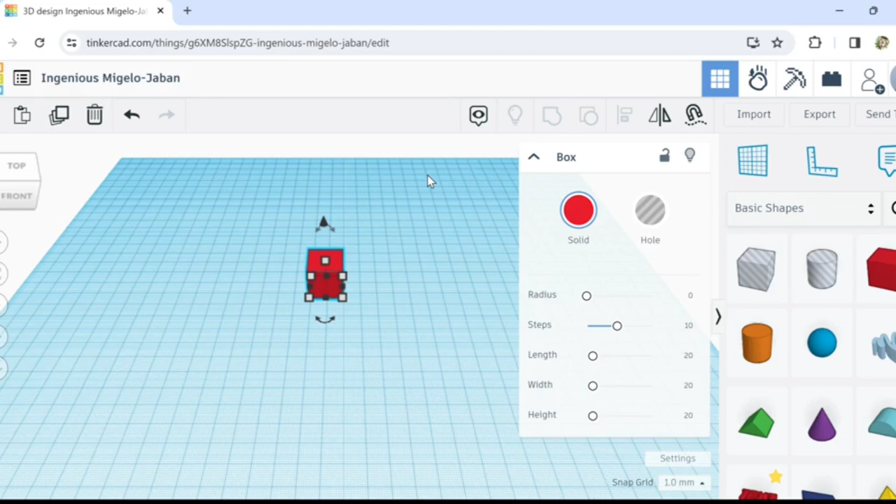Okay, so you guys probably saw the thumbnail - me and Troy are having another challenge. He got to choose the topic this time, and he chose a door, like a working door for a house. We have to try to get the hinges working, and maybe even make some internal parts. I don't know, we're not going to have a metal spring like a real door would have. I'm trying to think of how a normal door opens and closes with the knob. But anyway, let's start on our door, and we for sure have to get the hinges working, and we might even try to make the doorknob function somehow, maybe not like a regular door, but how we want it.

So let's just start, we'll kind of make it up as we go. Let's actually just make it real. We're gonna start off simple because I want to see if some of the stuff even works. So let's have a base for the frame. We want a platform like this, and then a door frame that comes up and around for our door to go in.

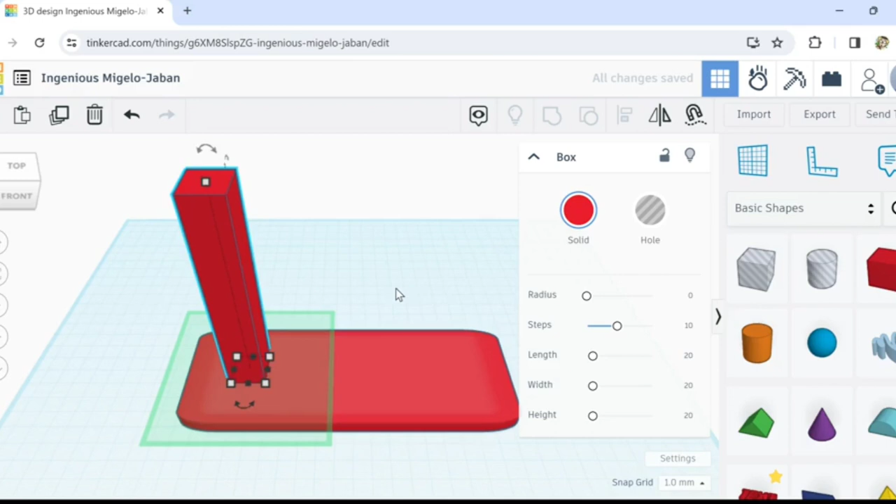We're not going to be too fussy. This is too wide though. Is 10 going to be too small of a frame? I don't know. Okay, 10 - that seems pretty small. Let's go 15 by 15.

Okay, hey, did you guys have a good Christmas? Anybody get a 3D printer? Oh, that'd be cool. Or even some filament would be a good gift. Ah, yeah.

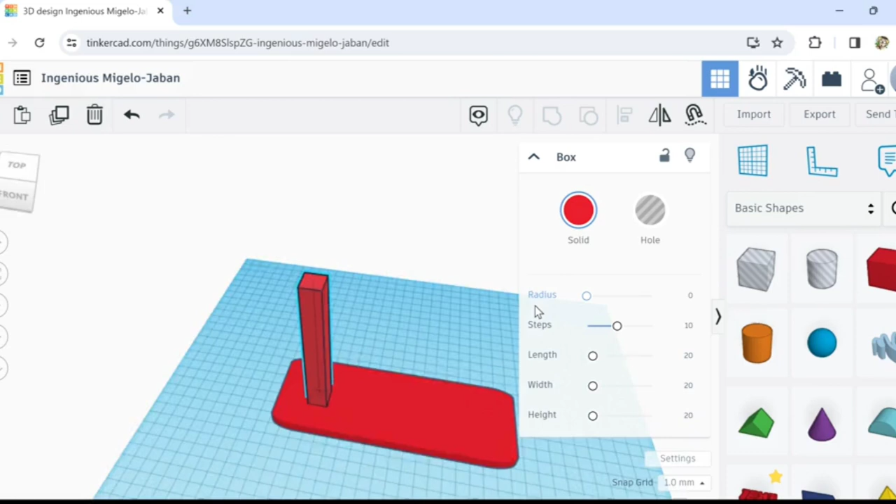Okay, like I said, we're not going to spend too much time on these trying to make everything perfect. Let's just get it moving so we can have most of our time for trying to get the hinge and maybe some kind of mechanism for the doorknob.

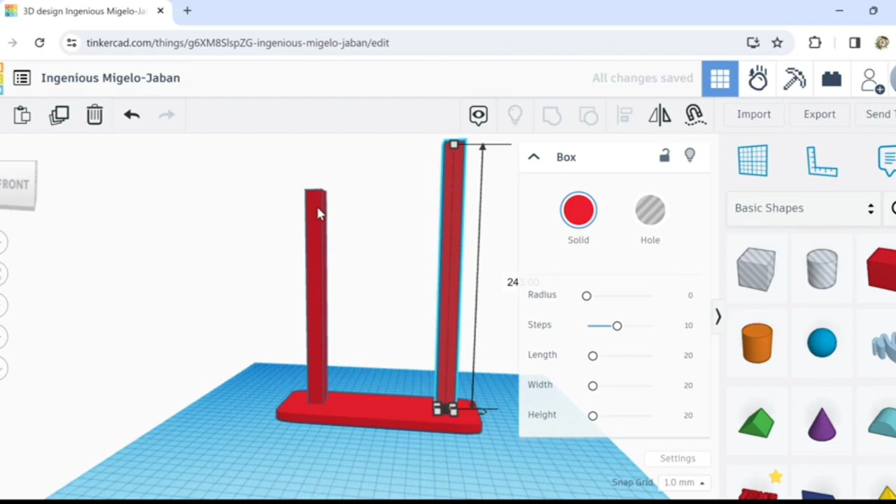Okay, let's just slide this over. How wide's the door? Let's go back a bit here. Okay, how tall is this? 243, okay we'll stick with that for now. Okay, let's duplicate this and flip it over. Oops, that was not what I wanted to do.

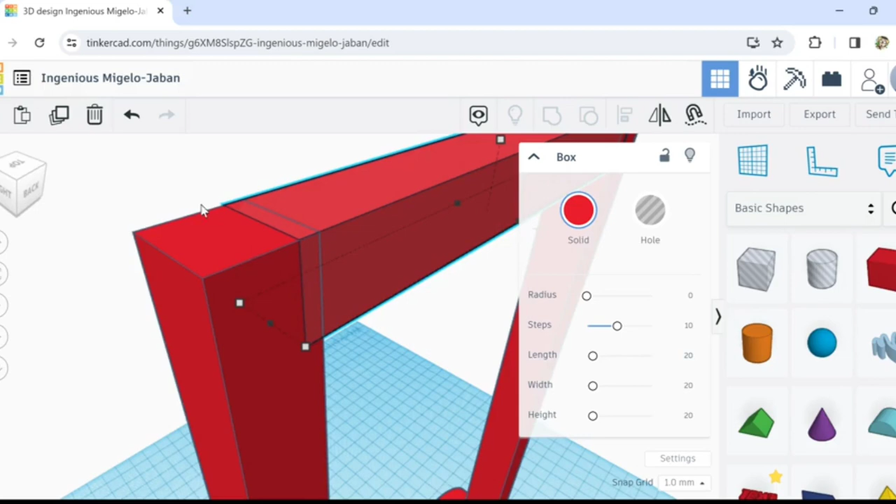Okay, let's just make a little top beam quick, nothing special. There, our door's done - it's just an open walkway. Are we gonna win? I'm not sure what Troy's doing, so we'll have to see. I don't know if I'll be able to get my door all crazy decorated, but I want to see if I can get it working.

Oh, I thought of something else too - do we want it to swing open both ways? Most doors just swing one way. We're going to have a stopper strip so the door only goes one way, so it only opens like this and then closes. So maybe the hinges will be right here.

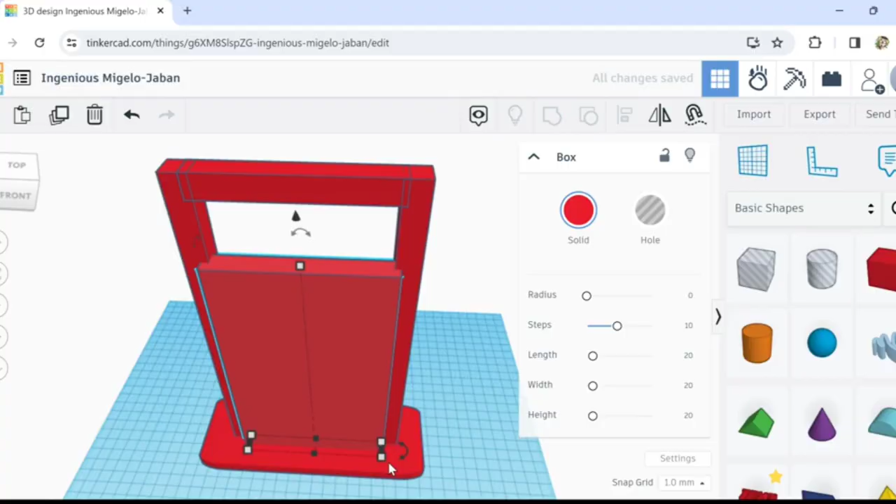Okay well, we could do this really ghetto - let's just duplicate this, and make this into our door. So let's just go like this. Whoops. Let's see what it looks like here.

Let's get a different color for the door. What color are doors? Great. Wait, I wish this door frame wasn't red, it looks too weird. Let's do a brown door frame, like a wooden one. There, we got to be able to visualize it, huh?

Okay, so we do have our little setup here. That'll be fine. Okay, I guess the first thing... oh gosh, I don't know if we're going to be able to get a doorknob mechanism inside of that door. Probably not.

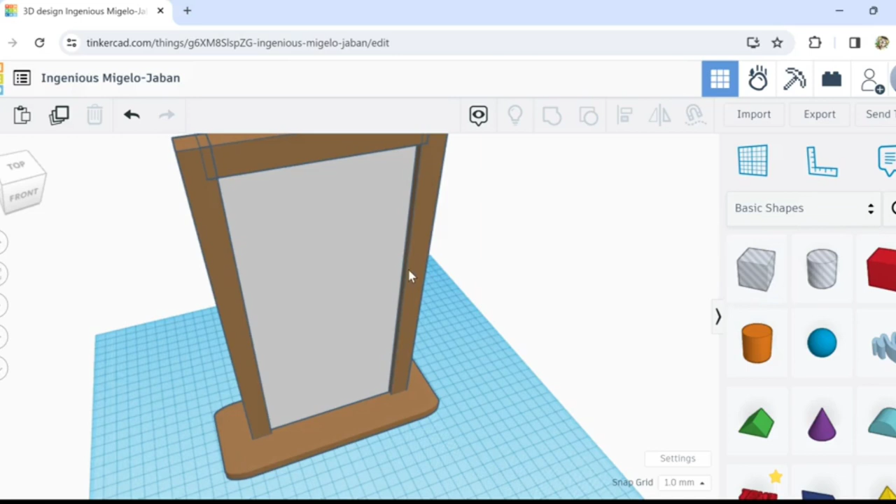Here, let's - I'll tell you what I was thinking. Oops, what am I doing? This and this. Oh, man.

I was thinking of having the knob attached to a gear inside the door. So when you turn the knob, it turns the gear, and that gear turns a little rod that comes out into the door or into the frame. But we'd have to internally fit that all inside there.

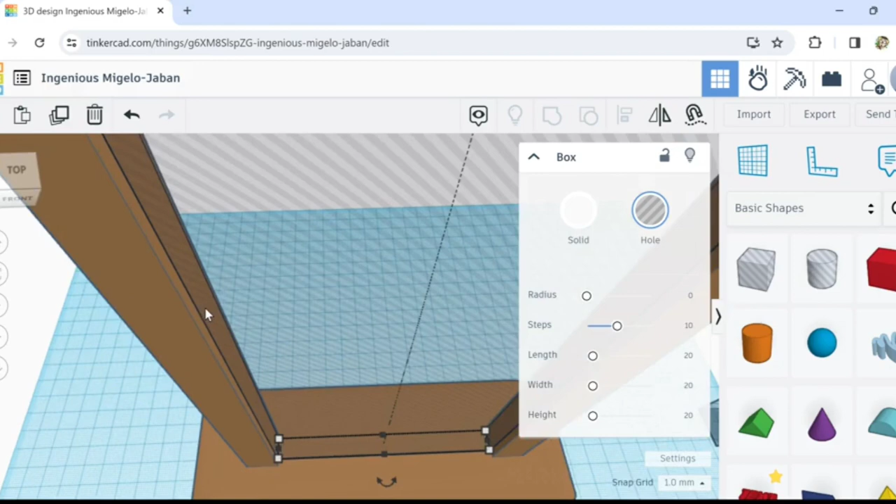Oh my gosh. Yeah, we might not be able to do that. But we do want to make it close shut and lock a little bit. So I have an idea how we could do it a lot easier. I guess we'll just do one step at a time.

Okay. Now for the hinges. A real door... okay, let's see how we could do this. Well, let's grab a real door, you know, the hinges.

There's like a pin that goes down to connect the two parts. So I wonder if we should do that, have like a pin type of hinge system. That'd be kind of cool. I've never done that. Okay, let me get it ready because I have a feeling I'm going to fumble around.

So I'm going to get a couple things ready and I'll bring you guys right back.

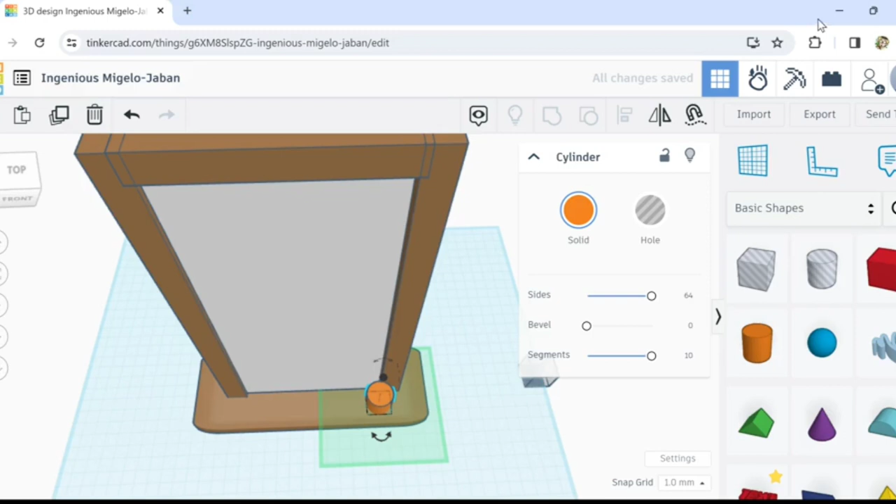Okay, so here's what I came up with. I have just these 3 little cylinders stacked on top of each other. And is there enough space between them? What the heck, how close are these? Oh dear, let me make these movements smaller.

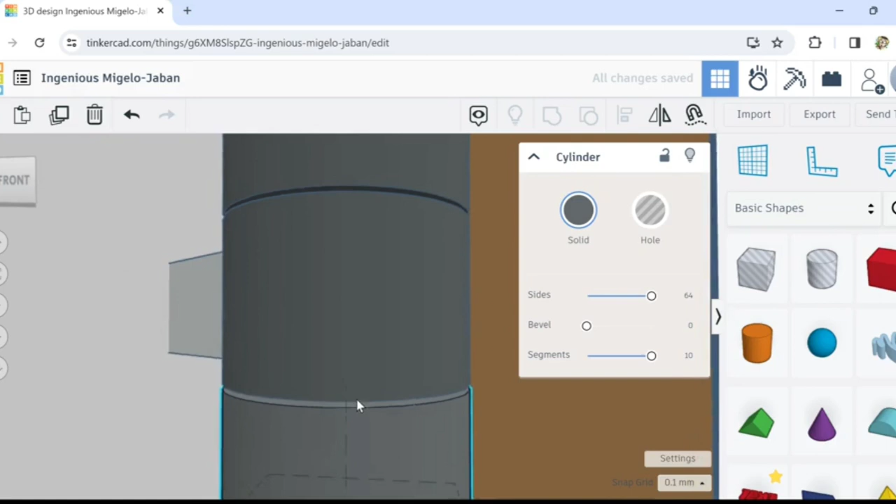I want a little bit of leeway, don't we? Okay, let's move these out before we connect them. Okay, that's good. Let's check the bottom one.

I would have done this already. I initially had some space, but I think I had to redo it or something. Hey, yeah, see, this one's got space. This one's got more space. Is that too much space? Okay, let's check it out.

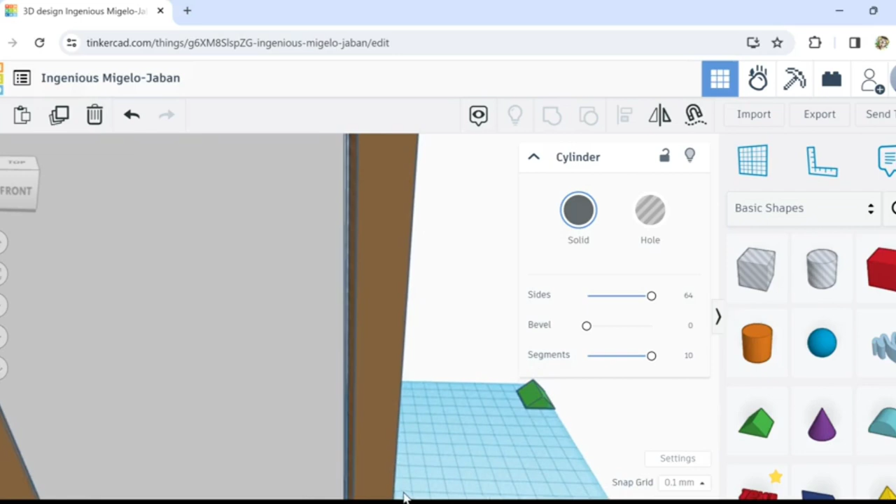Okay, I want it to be a pretty tight fit. So the only problem is I think if we 3D printed the pin, because see, I'm about to cut a hole through all these, if we 3D printed the pin, I think it would be too small and weak.

So what I'm going to do is use a little tiny nail that has the little flat top on it, and we're just going to drop it down into here and I'll cut it off. So it'll be like a little metal pin, like a real door. I think that will be awesome.

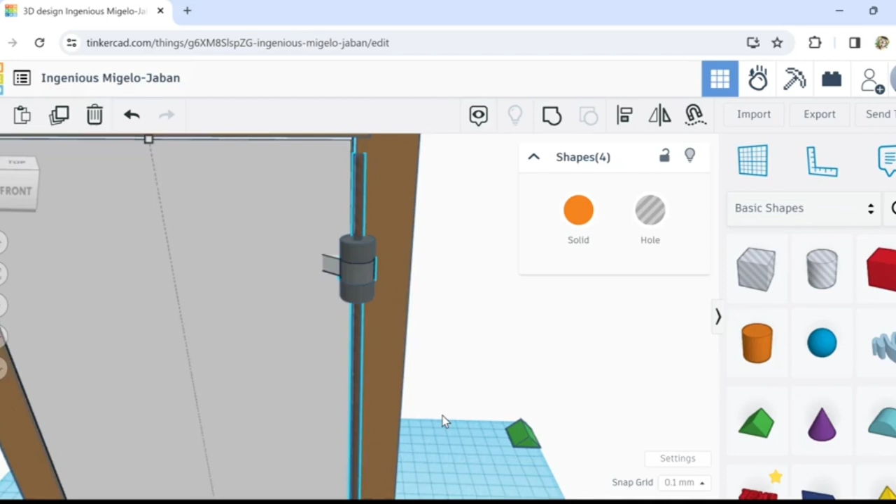So actually, let's duplicate this, because what we're going to do is group the door. See, the door is going to be attached to this middle one, and these two will be attached to the door frame. So it should make an easy little hinge-a-rooney.

So let's just select these. And did we select one of the... yes, we did. Okay, we selected this. Let's just group it.

Okay, and I also... here, let's move this a little. I also made sure there was a little cut right here, so this would not hit the door, you know? So this will fit right here, so the pin can go in. See? And we did that.

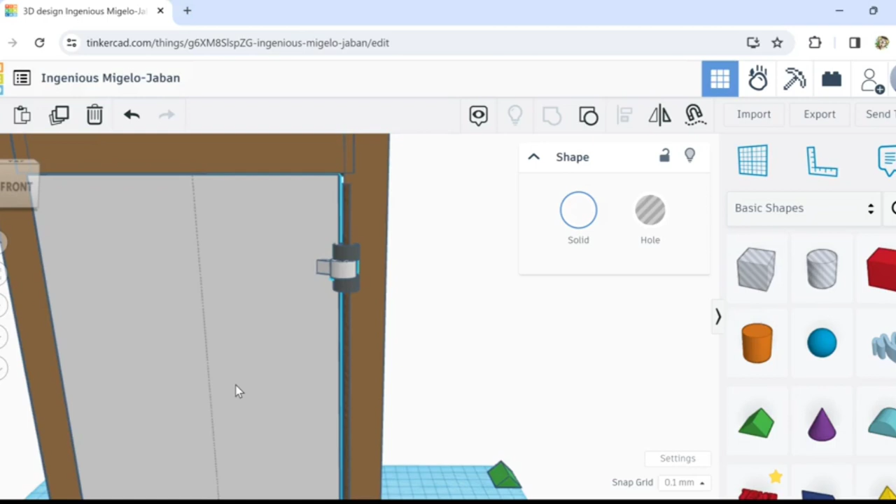It's only been, well, of recording, it's only been 12 minutes. So we can do more decorating on the door. I'll just print it separate, and then I'll put it in here and slide the pins in. So let's get this out of the way for a second.

Whoa! Yeah, I think that's kind of cool. The problem is, like I said, we'd have to print it huge or really big if we wanted to make a 3D printed pin, and I don't think that's necessary.

You know what? So let's just... I'd say we could just group this stuff together now. Okay. There. Okay, that's really cool, because now we can focus on the door itself, because the frame is pretty much done, except...

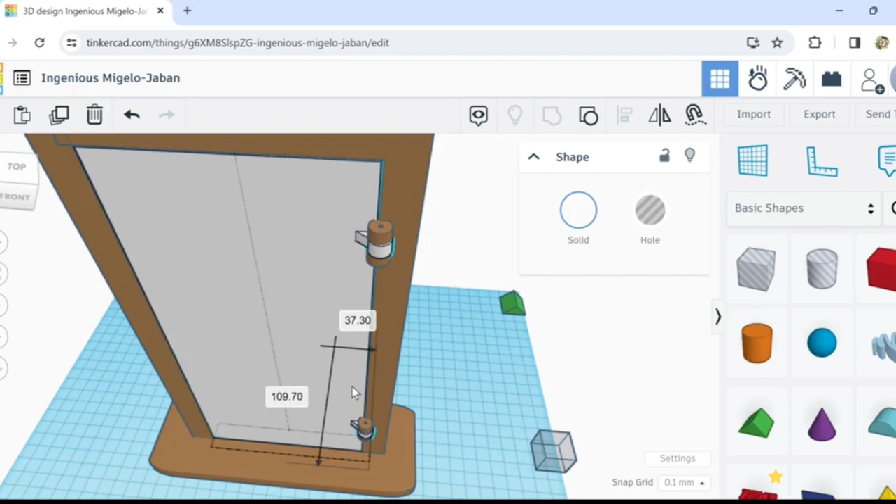Okay, let's check one more thing. Is that lined up? Okay, so what? It's going to go like that. Why am I fumbling? Okay, let's just say it's going to go like that.

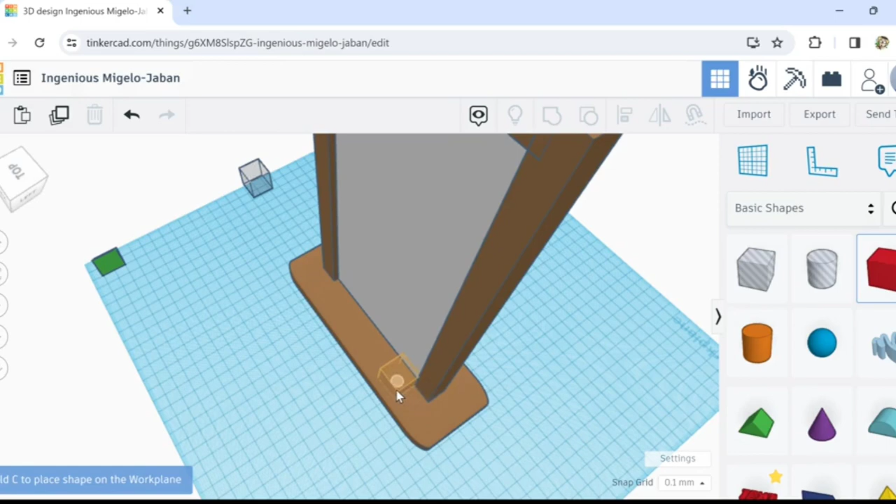Do we want... okay, and it's going to open towards us. So do we want like a little stopper? Let's check it out, you know what I'm saying? Yeah, maybe we should have like a little stopper thingy. Here, you'll see what I mean in a second here.

So you get what I'm saying? When we close the door, most doors would have like a little strip here to stop the door from getting too crazy. Okay, let's see, does it fit? Oh yeah, there we go. So yeah, I just kind of meant like this.

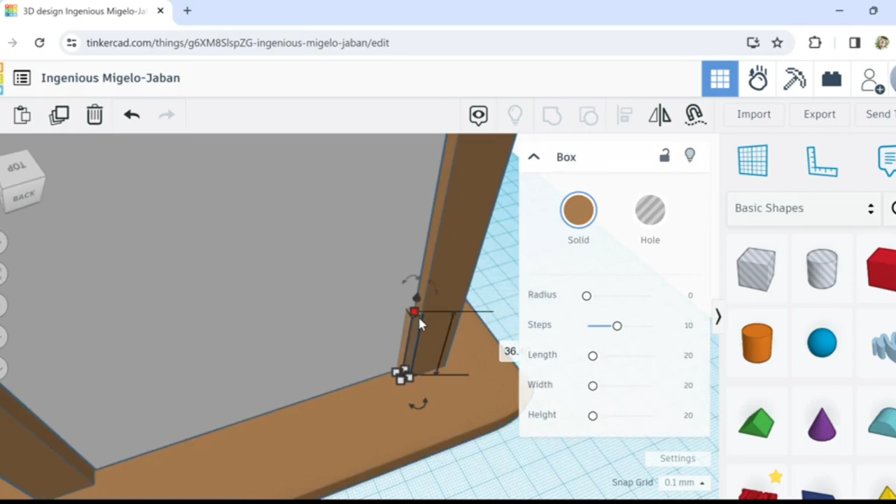We could turn it brown. Okay, and we just have to pull this baby up. Yeah, that'll be fine. Okay, let's pull it on up. Make sure it's going up in there. Oh yeah, we're good, we're good. Okay, there we go. Well, here, we might as well connect it to there, otherwise...

Wait, did we even group? I thought we already grouped all that stuff. Oh, we didn't group that side. Okay, whatever. Okay, there we go, look. Yeah, so there we go. See, the door will close and hit this. This will be the stopper, you know. Boop.

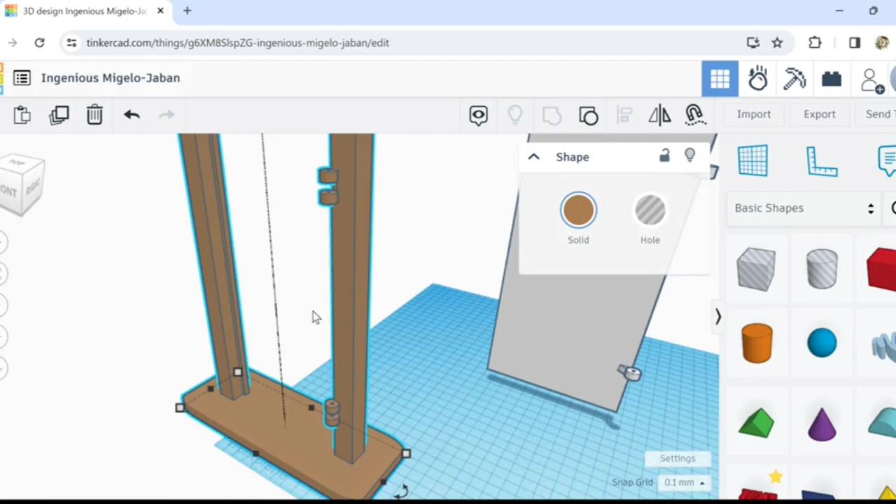Oh, crud. I guess we should figure out how it's going to latch close first. Okay, let's stare at it, or I'm going to stare at it and take a coffee break. Yeah.

Okay, what if we just do something simple, very simple, like this? So if we had a part, yeah, if we had part of the little sphere sticking out of the door, and then have a little dent that it fits into. You know, so like, let's say we make another one. So let's duplicate it, turn it to a hole, and then let's put it in here like that.

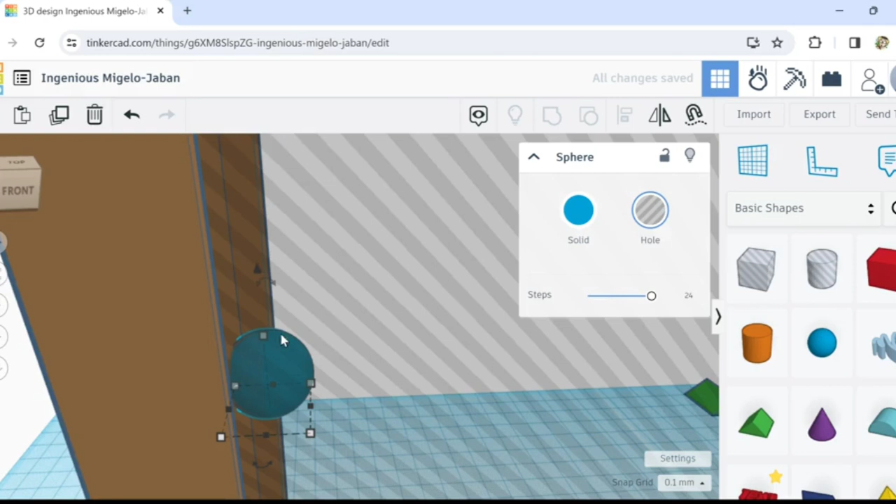Okay, and now combine that with the frame so it'll cut. Okay, there, so see, there's a little cut spot now.

Yeah, so now we got to select this ball. If you ever want to select something that's inside of something, just zoom all the way in until it highlights it, like there, see, now you can select it. There, we got it. And oh, we don't want this selected though. Okay. Uh-oh, darn it. Okay, start over.

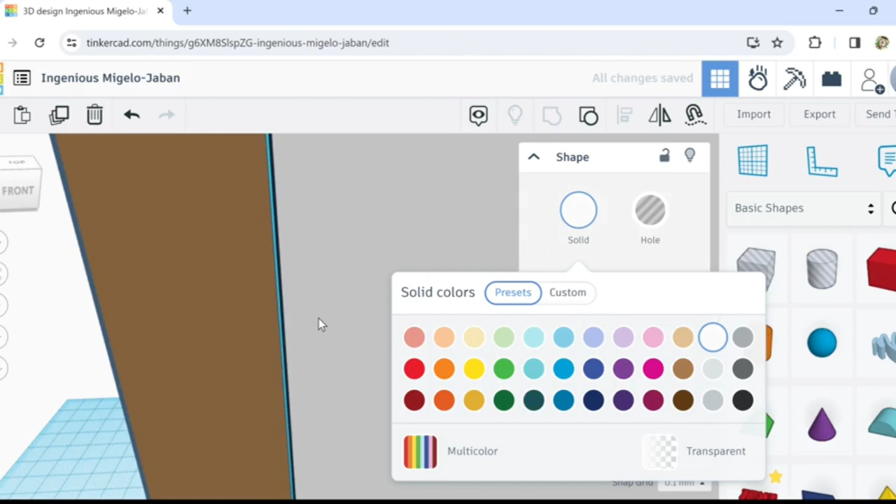Okay, select the door and the ball. Come on now, there we go. It shouldn't have been so hard. Okay, now hit group.

Okay, so now if we look, see? I think that's fine. So yeah, so this will just kind of close and snap into there, you know? So a very kind of simple, cheesy way to do it, but at least the door will stay closed, hopefully.

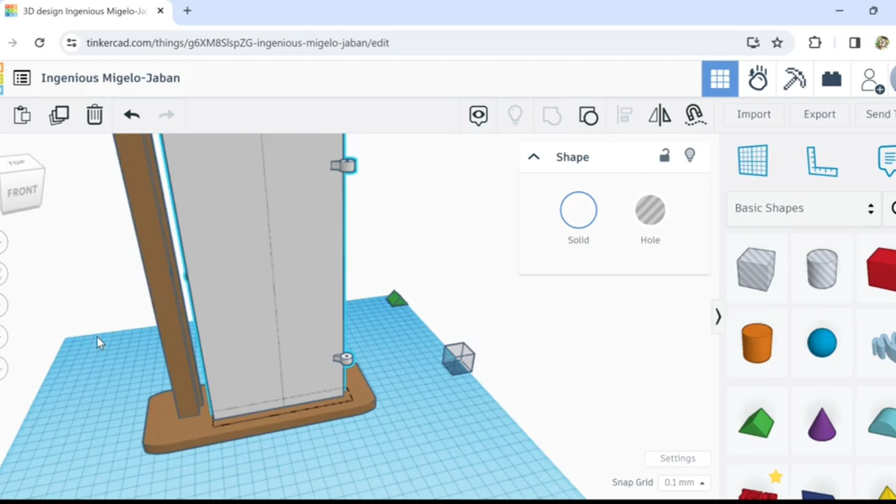Okay, let's get this looking like an actual door. This looks like a door to an insane asylum or something with no windows. We want some windows or something.

Okay, let's put this off to the side because we're pretty much done with that. Let's get rid of that. Okay, we are going to... so what we're probably going to do... oops, what am I doing?

Okay, so we're going to have to print this door. We're definitely going to want to print this door laying down. So let's do that. Okay, we'll hit D to drop it. Boop. Okay, there we go.

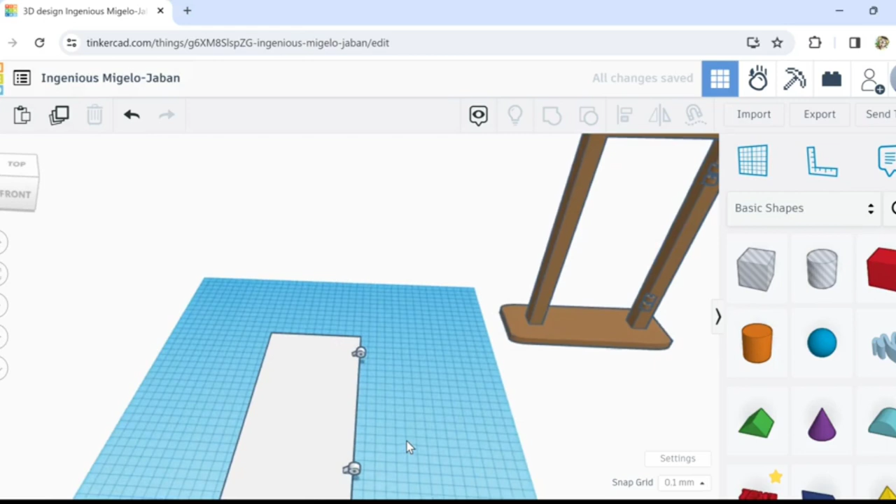Okay, let's think of what we want to add to it. So I think me and Troy think a lot alike when we are doing these challenges for some reason. And I almost guarantee, I bet he did something with the ring. You know how them cool doors have like that knocker ring on them? So like it'll be like a lion's head with the ring in his mouth, and then you go dunk, dunk, dunk. I have a feeling he did some kind of knocker ring on his. I could be wrong, but probably not. So we are going to not do that.

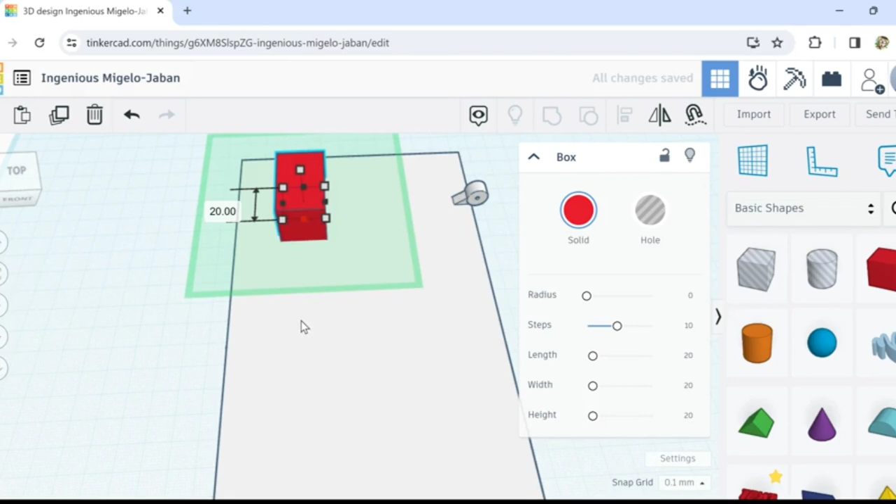So they're not the same. We're going to do ours more like a normal door. Let's do some windows and some kind of textures and decoration or wood trim, and we'll just see how it looks. I mean, that might be a little boring, but I kind of want mine to look like a normal house door, because I'm starting to do miniatures and stuff. I might even build like a little dollhouse or a room that I can 3D print objects and fill it, you know. So I think having a realistic door might be kind of cool.

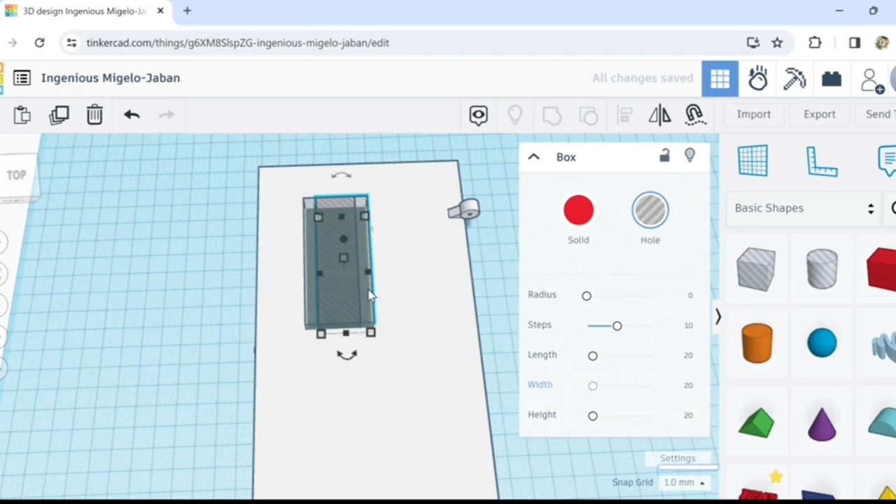Okay, so let me get, once again, because sometimes these videos get really long, I'm going to cut out some window shapes here. And, well, let's see, I was going to pause you guys, but let's just get it kind of rocking here. Oh, we need a little bit faster movements here. See, I'm thinking of just kind of something like this, and I might even, oops, let's see.

Let's see, should we delete this one, or I might even try to put some kind of little layer of clear plastic in it, so it looks like it has glass in it. I might try to do that. We'll see.

So, I'm thinking something like this. We'll duplicate it. Okay, for the top, for the window of it, like something like this maybe? Okay, I'll come up with a few little things and I'll bring you guys back in to see what we're going to do.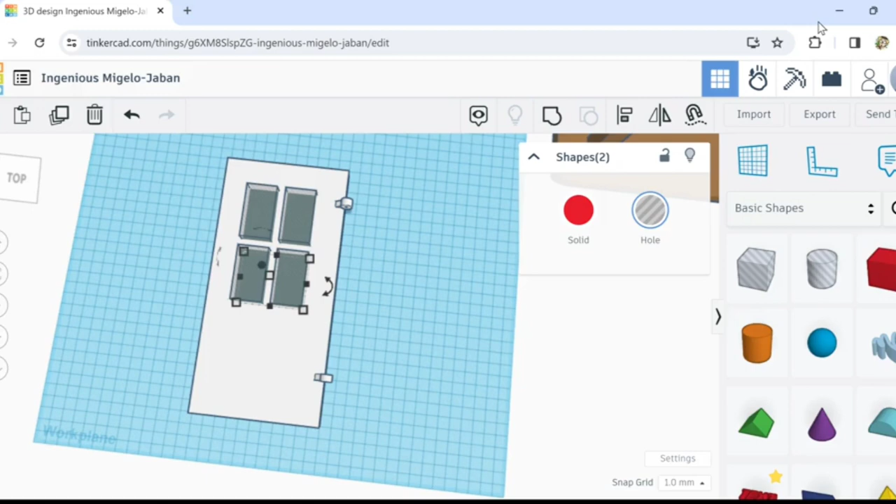Okay, so let's see what I got here. Actually, let's duplicate this so we have 2 sets of these cutouts. Yeah, so I made this piece as a little piece of trim that we will add to this afterwards. We can add it to both sides. We'll print it twice. So here, let's group these together.

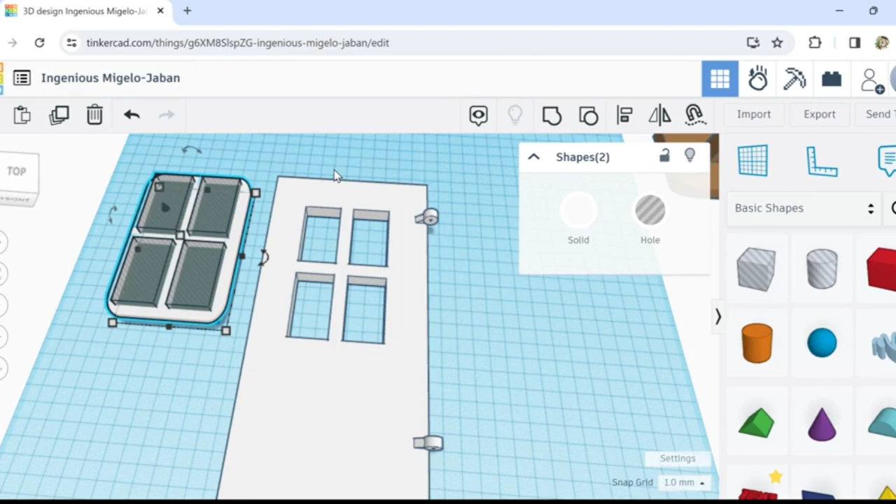Okay, so see, we got our holes cut. And then this will be the trim, you know, so this don't look so boring. Okay, group. There we go. And yeah, so see, this will go get glued onto here afterwards.

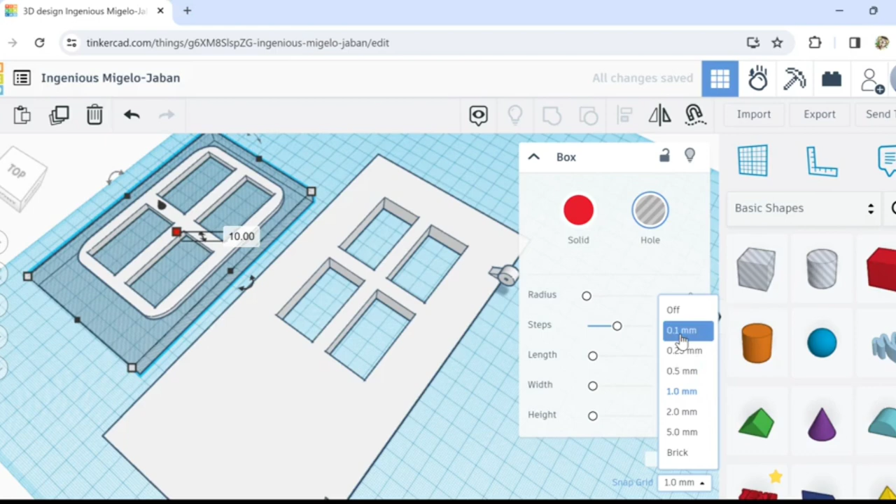And let's cut it flat. Let's see. Does this even have a flat bottom? Let's cut it a little flatter. Okay, let's change this back to 0.1. Let's cut a little bit off the bottom so it's not quite so thick, and then it's got a nice flat bottom too. Okay, let's raise this up.

I want this kind of flat so it doesn't look too crazy. Okay, let's just go with that. Okay, and group. Okay. Yeah, that's good. That's good.

Okay, now are we going to put a piece of... Should I put a real piece of glass in there? Wouldn't that be cool? Or I could find some real sturdy clear plastic, like when you buy something in the store and it's in that clear plastic that's really hard to open without scissors.

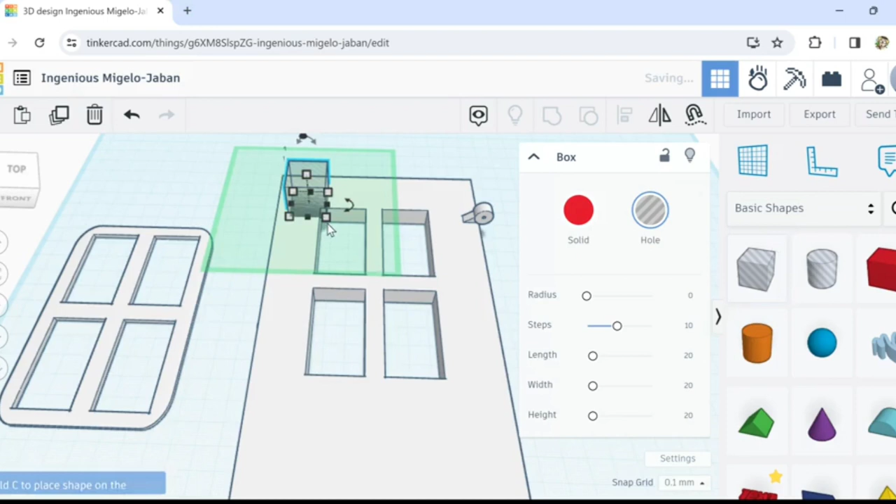I could probably just, maybe we should make a little indent for some of that plastic to fit in, like, you know. Here, let's see. So here, let's go like this. So yeah, you know what I'm saying? Maybe we should make a little depression. That would probably be fine, actually.

Okay, hold on a second. Okay, let's drop it down. What? Okay, so that's like 0.5 millimeters. Yeah, because see, I could cut a little piece of that sturdy plastic and fit it right in there. Oh, it's going to print weird, though. Oh, because this will be floating above.

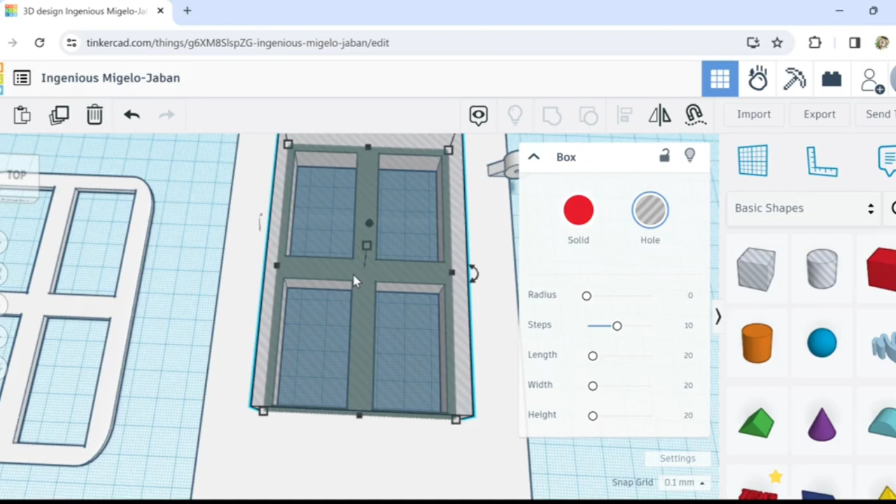Uh-oh. Maybe I don't like that idea. Because, see, I want to do everything on both sides. Oh wait, well never mind, never mind. Pretend I didn't say that. We can just add the plastic in on one side. Yeah, never mind, this will work.

So let's actually have it go down like that. Perfect. I think I'm just overthinking it. Okay, let's group it. There. See? Okay. So we'll cut a piece of thin plastic that'll fit in there.

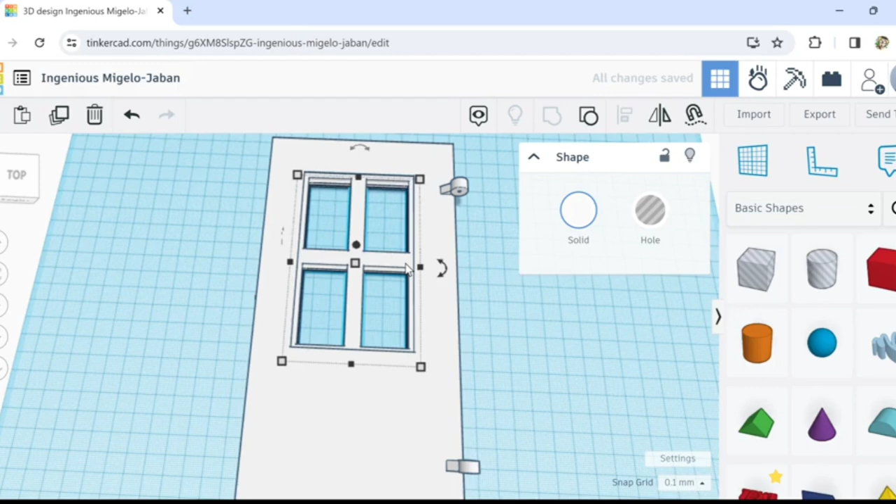And then glue this on. Oops. Yeah, and then these will get glued onto both sides, so we'll need 2 of them. We'll just leave it... Let's see. We'll just leave it connected for now so we can visualize.

Uh-oh. Wait, that should be different. Wait, why does it connect? Hold on a second. Oh... Oh, I see. Uh-oh. Okay, no, never mind. Jeez, I am really...

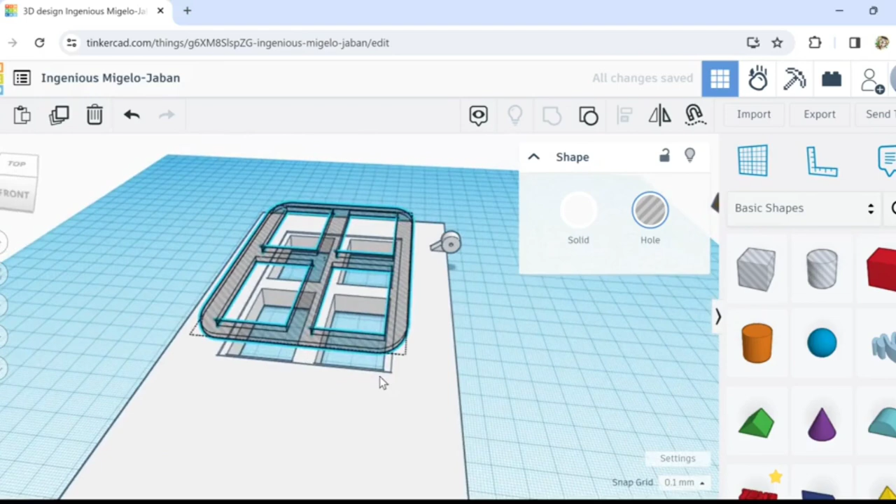It's just a door. It's just a door. It'll be fine, because it'll print just like this. Because see, these got cut down a tiny bit lower, but that'll work because it's going to print upward. So, wow, I'm just overthinking it. Okay, drop that down. We're going to need 2 of them, so let's just make another one.

Okay, that's good. Oh yeah, we got to make a doorknob. I mean, that should be pretty easy. Well, we got to make 2 of them. Yeah, let's just...

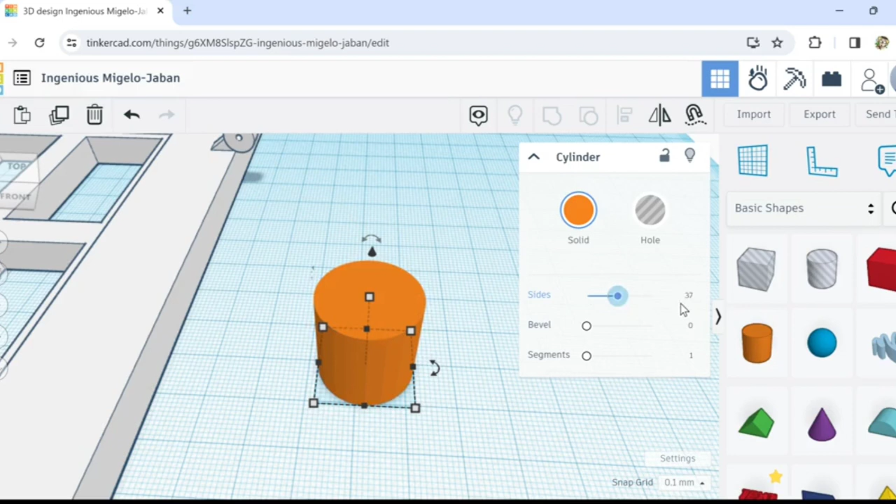Do we want a doorknob or kind of like a weird curvy handle? I kind of just want a doorknob. Do we make a doorknob? We already made a doorknob on something, didn't we? Okay, well, let's just make another one. Okay, why don't we start with something like that? I want to make it so it won't need supports, you know?

Okay, let's line these up. Okay, this is nice and weird looking.

Okay, put that over here. I'm just kind of winging it. So see, here's the little post that the doorknob would be on. We'll align it afterwards. And then what? Another one of these?

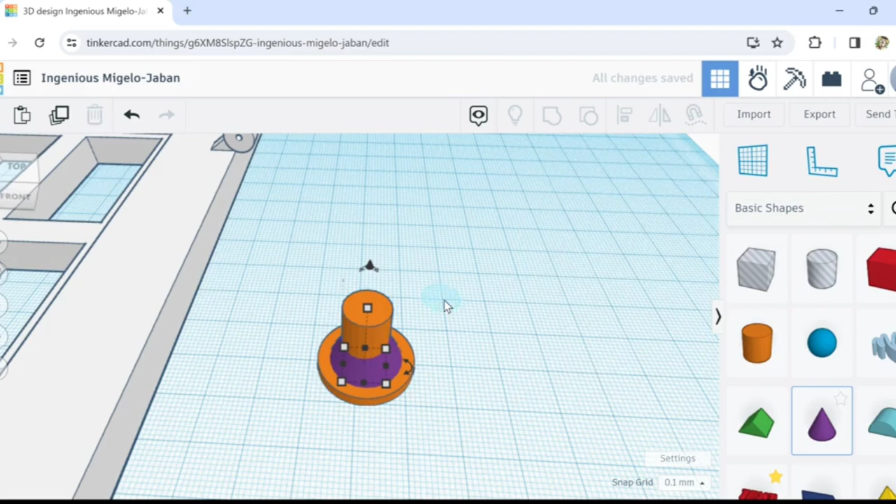And then, oh, maybe we could... Let's see, is there... yeah. Should we try... we could do the doorknob something like this, couldn't we? Yeah, I don't see why not. Oh yeah, oops, oops, come on now.

Yeah, look, we could even add to the sides. There's doorknobs that have like facets, you know? I kind of like that. Okay, we'll need to make it a tiny bit bigger, I think.

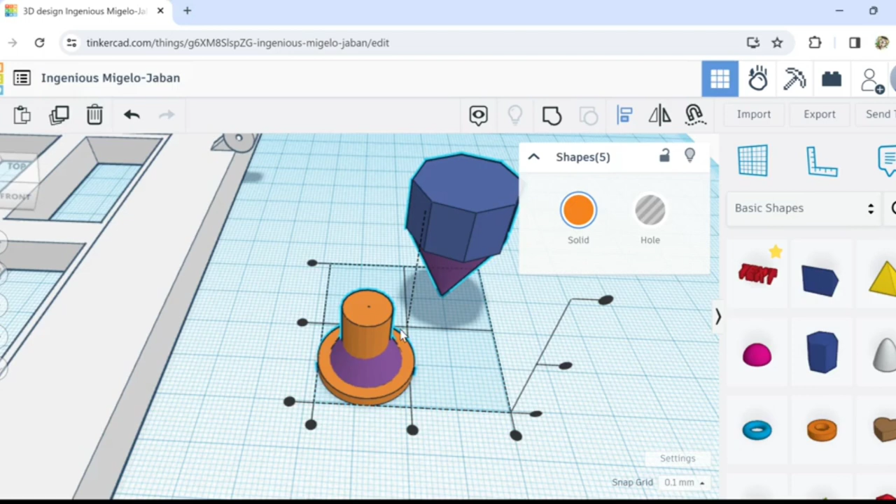This is, it's all different colors and goofy. Here, look, we can line everything up now. Ready? Boop. Boop. Dude.

This is great. Let's see. It's over. Do we have to make this bigger? You get what I'm saying? It's a little weird, but we don't want these hanging over. Honestly, that's going to be so small, you're not even going to notice that. None of that. Okay, let's make it into a color, because this is weird.

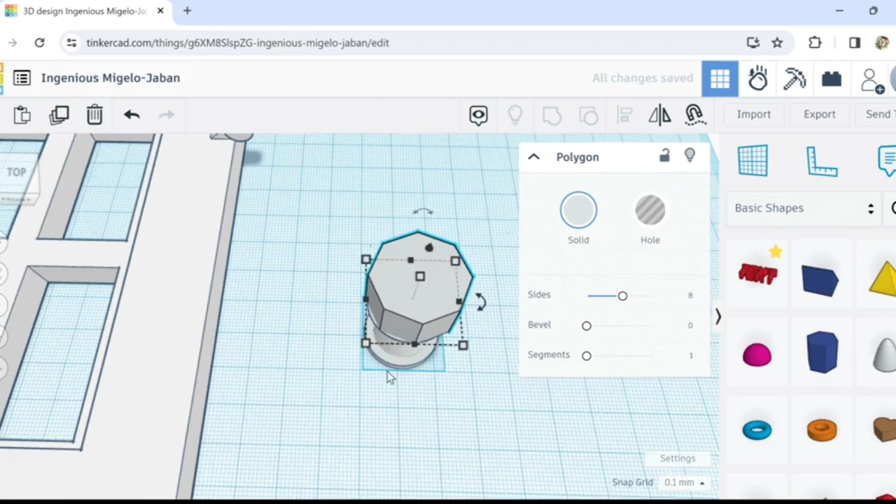Dude! It's great. Okay, fine. We'll make this a little bigger. We just can't have the overhangs too crazy, or it's going to be weird. Okay, let's line it up one more time, and we could group it together. Then we'll just figure out the size.

Oh, I feel like we could add one more. Let's add one more little detail. Here, let's turn this white. Yeah, there we go, that's cool too. All right, one more time with the align.

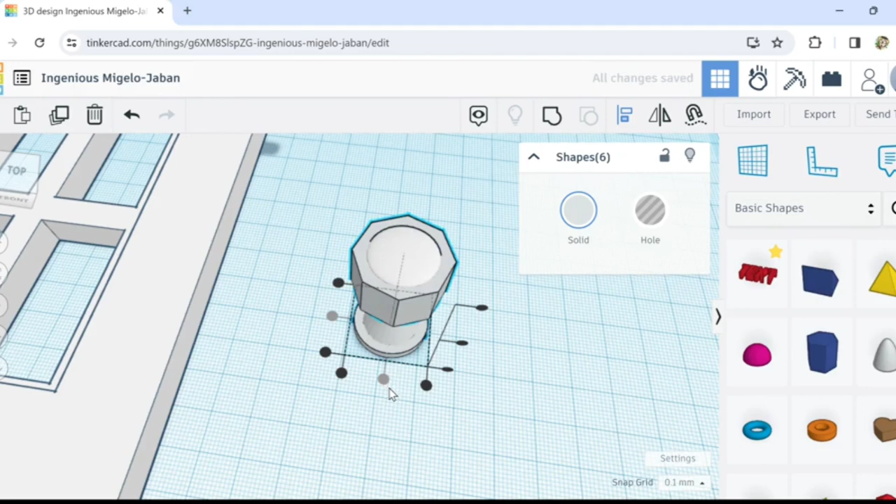There we go. Is this whole thing too tall? Should we, well, here, let's group the whole thing because we like it. And what if we just squat it down a little bit? Yeah.

Okay, hey, we did good. I hope our door's not too mundane. Troy's is probably got to have dragons flying across it and bulls with nose rings for knockers.

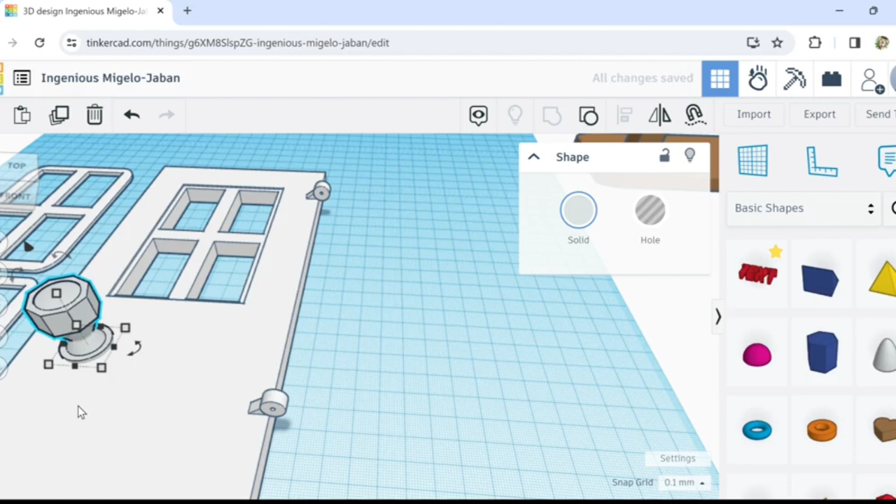Okay, we could just have a giant doorknob. How about that? JK. Okay.

So let's make this a lot smaller. And let's make sure it makes sense. Where would we put this thing? Up by the lock up here?

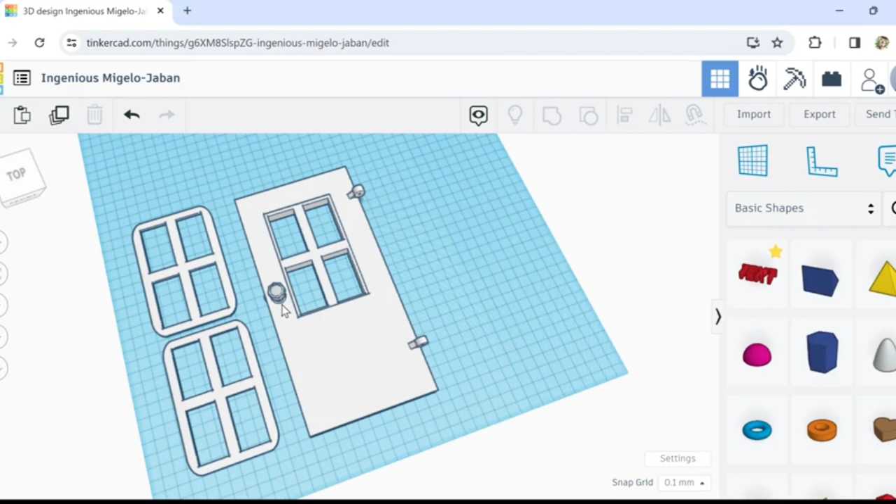Okay, let me look at a real door. I think that is... Actually, that's probably good. I mean, I guess we should probably keep it lined up with this, with the lock. I hope this isn't too high up, because we don't want to redo this part.

Okay. I'd say that's good. We don't want to make this doorknob much smaller, or it's not going to print very good, probably. Okay. Yeah, I think we'll go with that.

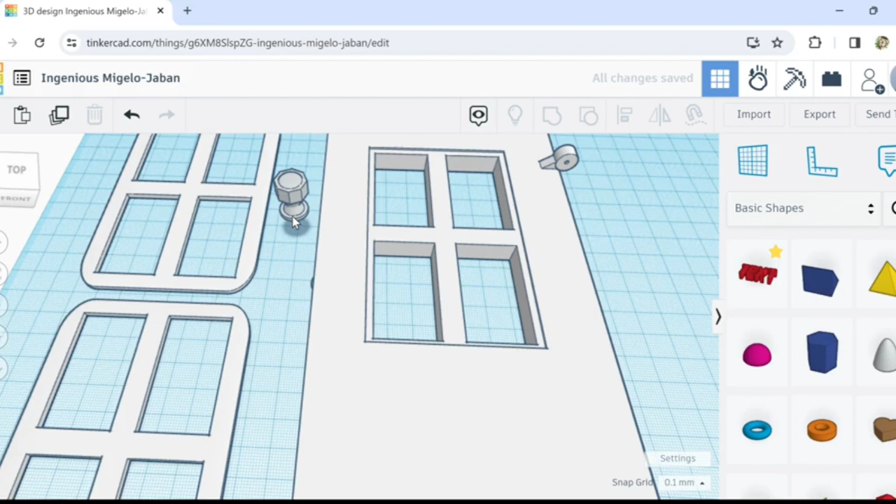Okay, so now we just have to drop this to the ground and duplicate it. So we need 2 of them. Yeah, I'll just glue this stuff on afterwards, like a little model kit, you know? It'll be great.

Okay, let's just add... let me think, let's add one more. This is really blank down here. Let's add something down here, and I think we'll be able to start printing and see if the hinges work.

Okay, hold on one second. I got to think of something to add here. Something quick. Okay, let's try something here. Quick, let's cut the top off of this pyramid.

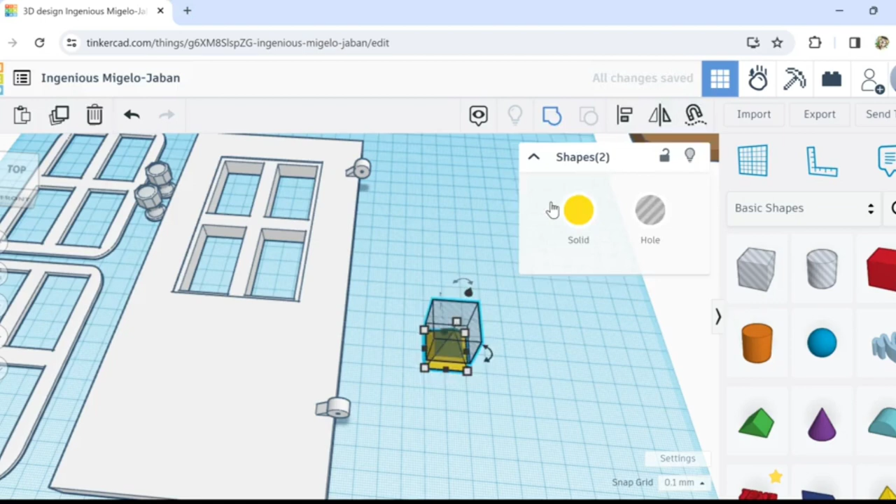Let's see, maybe like right there? Sure, okay, group. Okay, see if we cut the top off of this and then smash it flat. This could make a pretty cool, yeah.

Pretty cool, I think. Let's see. Yeah, this is exactly what I was picturing. Kind of like just a decorative thing. Here, let's make it white so it doesn't look so weird.

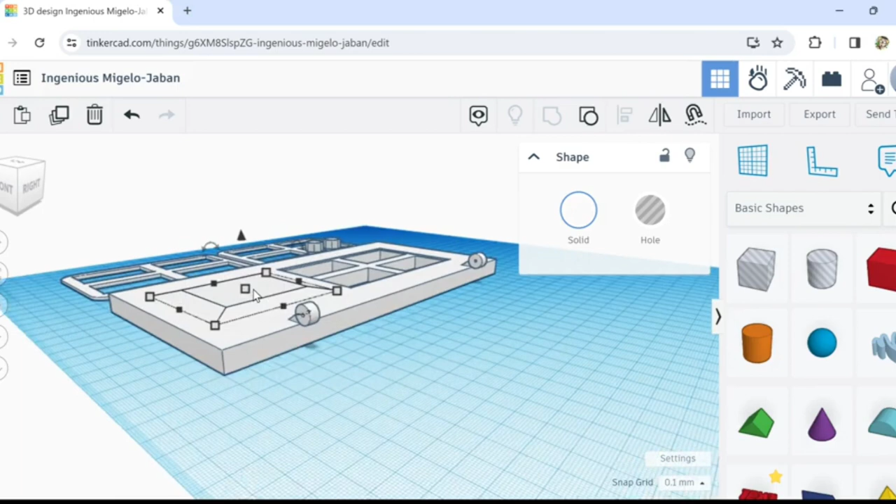Yeah, see? Hold on, it might be too tall still. It's just got to be subtle. Oh yeah, that's way too tall. Well, actually, we're going to have these on there.

Well, here, let's... we almost have to grab one of these and kind of visualize. La la la dee. Okay. We don't have to line it up perfect.

Okay, let me just see. It still looks like this is... yeah, this is still sticking up too much. So let's make this flatter. Jeez, is that even sticking up now?

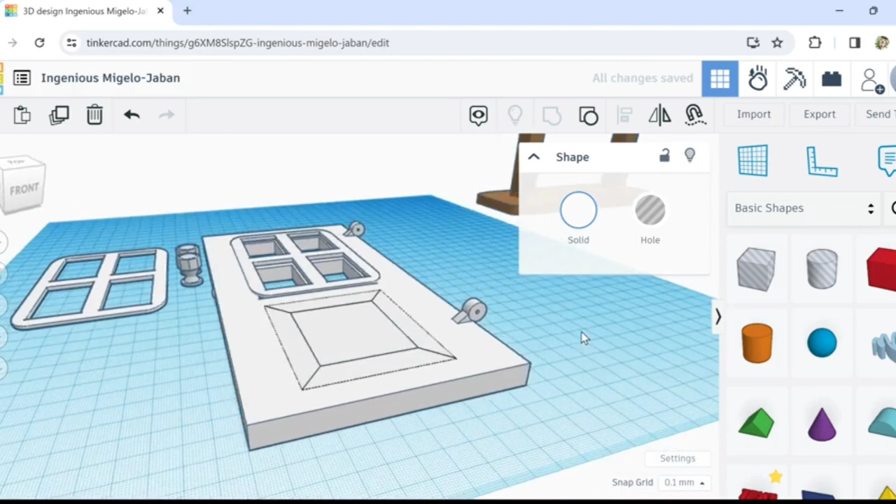Oh my goodness, okay hold on. 0.1, here let's do 0.5. Nah, we're going to have to at least do... just so it prints good, let's at least do 1 millimeter. Okay.

Is this going to work? Yeah, because a lot of doors have some kind of weird little texture on them like this. Well, maybe we should just get a look at our door now.

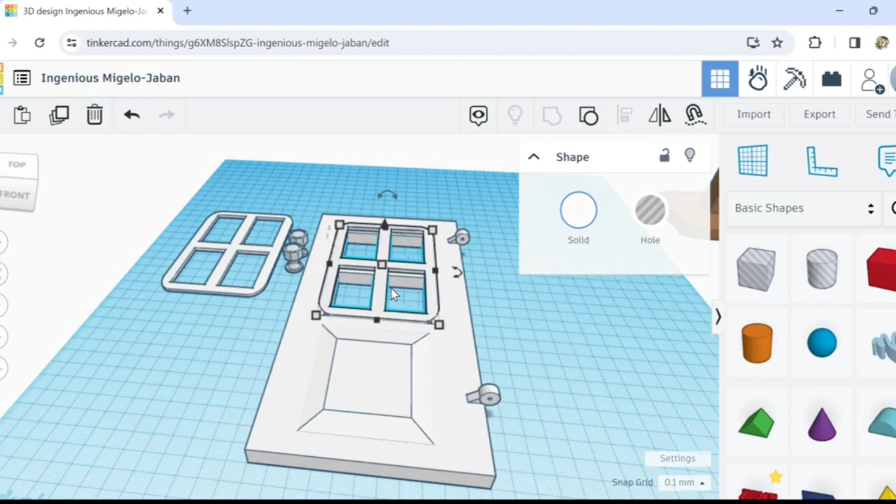Okay, let's grab one of the knobs. Can't we use the cruising feature here? Oops, I already screwed it up. Okay, cruising feature. Did I do it? Oh yeah, that time it worked.

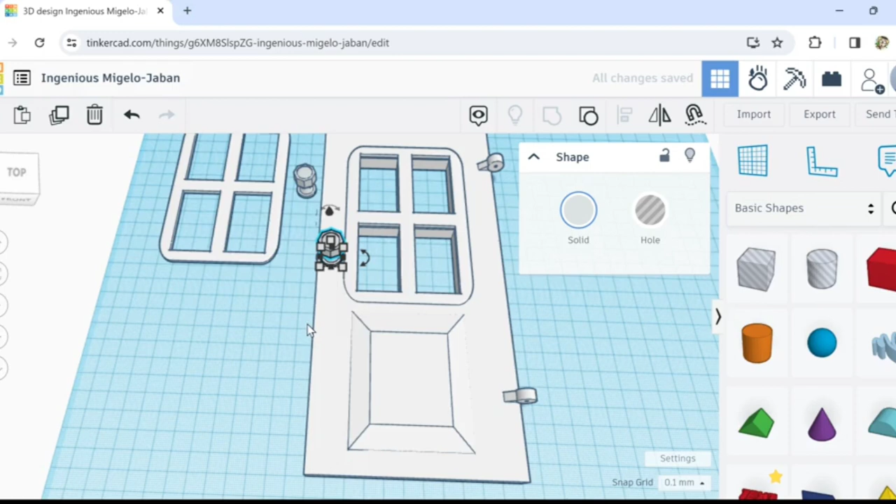I'm still wondering if our doorknob is too high up. Oh dear. Good thing we tested it out, because look, it might even hit this. Maybe not. Oh, here.

Okay, let's put that down. Oh yeah, see, we were a lot higher up than I thought.

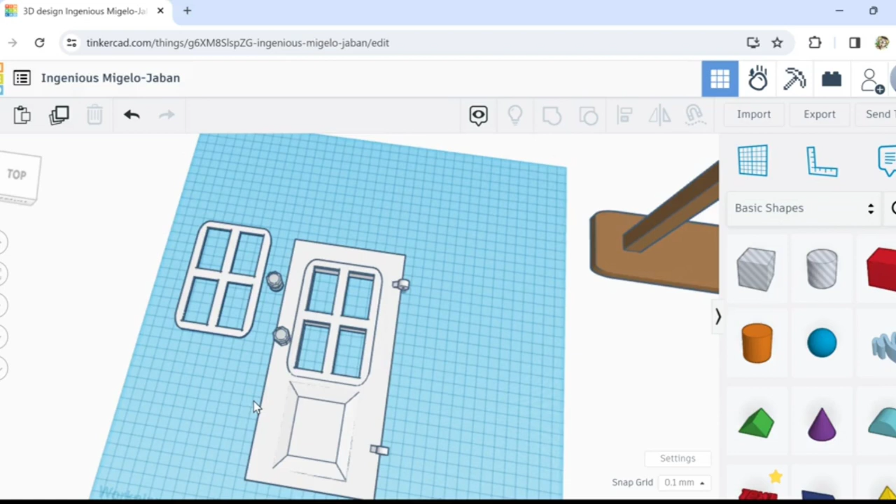Okay, yeah, I like this. This is awesome. So each side will have this. This doorknob is still a little too high, but I think we'll just go with it. So yeah, we'll need 2 of these.

Set this up here. Okay, drop that to the ground and duplicate. Alright, so we have a lot of stuff to print out here. And we also have the frame. There we go, there's everything.

Alright, I guess the only thing to do now is to get printing and see if it actually swings open and closed, because that seems important. So I wonder if I should just print this and this first. I'll just print it all. Okay, see you guys in a second.

And whoa, there we go, guys. Oh my gosh, look. Now, is that a door or is that a door? That is a door. Congratulations. Check it out. Ready? Dude, look at how realistic and accurate it is.

Okay, I gotta admit something, though. This morning, I woke up and had to glue these parts on, because I glued the other side yesterday with some better glue that takes a while to dry. So this morning I had to glue these parts onto this side of the door, but I forgot to put in the window, the plastic I was going to put in there to make it look like it had glass. I would have had to do that before I glued this on. So just pretend, use your imagination. This is supposed to have glass in here.

Otherwise, everything looks awesome. I'm definitely minusing myself points for using the little metal nail as the hinge. It works absolutely awesome, but technically it's not 3D printed. Let's see if we can focus on that. Oh yeah, look at that, it's got a tiny little nail in there. Look at how great it is. It seems like that would last a long time too. Yeah, look at everything, it looks so great.

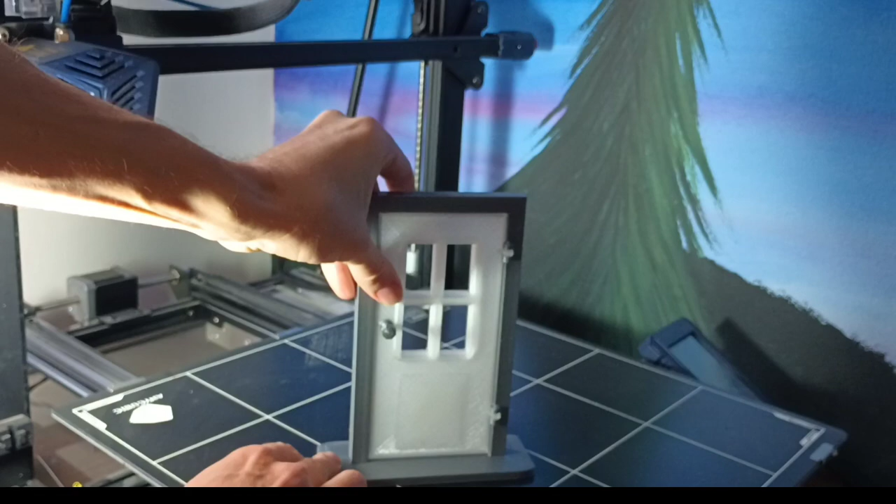Oops, shaky tripod. We have this nice little base, and you know what, this little knob, this little ball that fits into the other, it works perfectly. Let me make sure, watch, listen. See, it's like closed, so it actually locks closed. And it's got this nice base. So just kind of a simple, realistic looking door.

It's really awesome, and it only opens the one way. We did that on purpose. It's got the little ridge right here, the little stopper. It's awesome. I will admit, I got a sneak peek of Troy's though, and he might have kicked my butt this time. But I already have to minus myself points by using the little metal nail for the hinge anyway. So I haven't seen Troy's full video clips that he sent, but I got a sneak peek. So we're going to have to take a look at his now. Bye.

Hello, and welcome to my most ambitious project yet. This one, whoofda, yeah, this one was a doozer. Man, where do I even start?

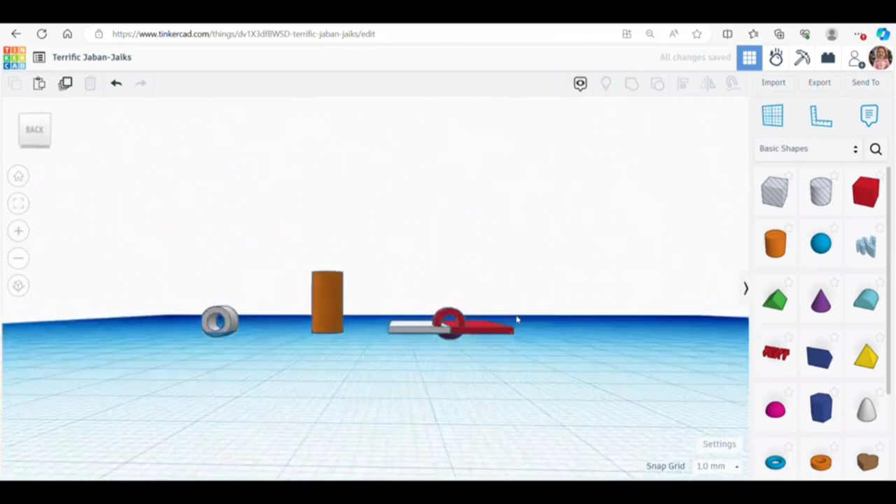The hinge itself that you're watching right now, that took me probably about an hour to get the hang of. And the rest of it, the door, over the course of I don't even remember how long, a couple weeks maybe, took me about 8 hours. So this is essentially an 8 hour video that I sped up 1000%.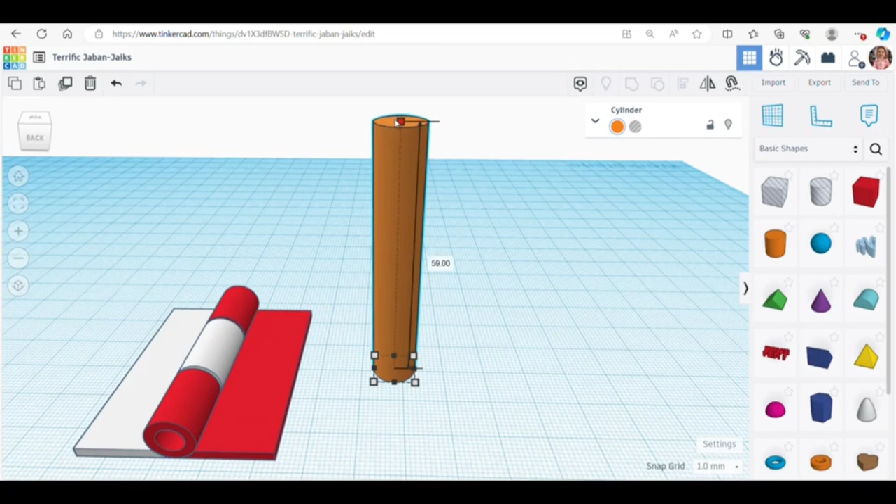And even then, it still dropped it to, I want to say it was like 48 minutes. From that 48-minute video, I basically had to cut out all the non-essential kind of stuff you probably didn't need to see, just to shrink it down to overall about a 7-minute video.

Whew, but it was a fun challenge. I'm really just proud that I did it. And as tough as some of it was, kind of overcoming the hurdles and things I had to overcome, all that kind of fun stuff. It was a tough one, but I think it worked out really well in the end, as you'll see in just a couple minutes here.

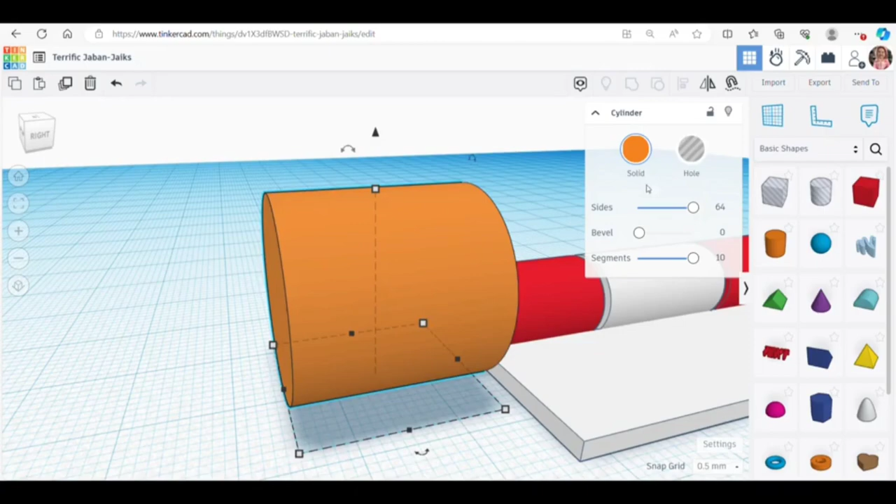But what you'll notice when we get through the hinge stuff, when I start working on the door in a second here, is the door might seem familiar to you. So we'll see if you can guess where it's from before you see the final product.

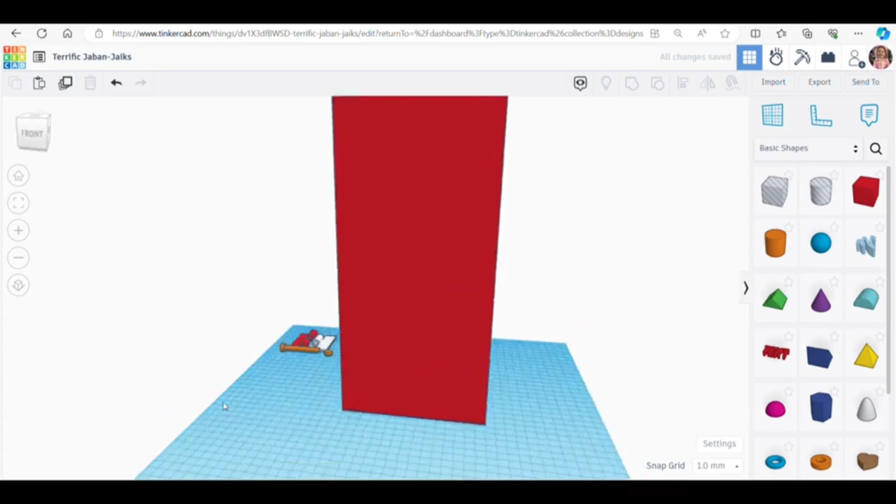Oh, hello there. Can I talk? Am I allowed? I can't help myself, I gotta do my own voiceover now. Okay, wow, for one thing, that hinge is awesome. Dude, we did like my whole door in like an hour. So Troy gets major props for putting the time in. Oh, now my hinge is stupid. Okay, pay attention, I'm gonna watch with you guys. So actually, this is the first time I've seen this also. I'm just going to watch and talk because I'm good at talking.

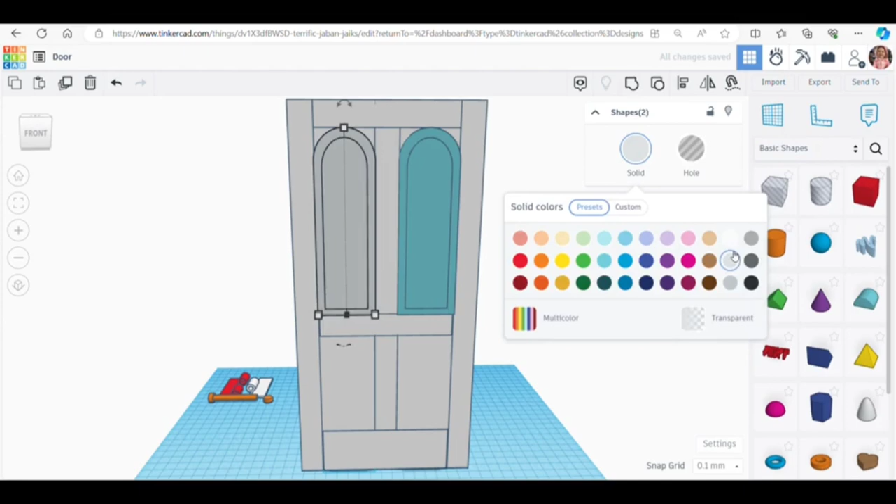Oh yeah, I see, he's getting some 3D structure. And like he said, you guys might recognize this door soon, or by the end you will, because I actually got cheated, I got a little sneak peek of the finished door before I watched any of this when he sent me the clip. So he is actually copying the specific texture of an actual door that most people would recognize, or you'll know about it when it's told what it is. I'm so good at talking.

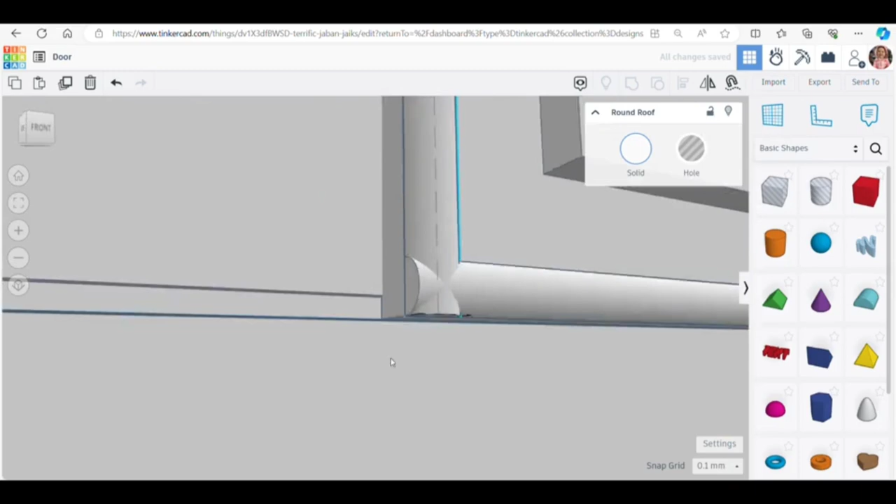Okay, oh yeah, so lots of little details, very cool. Oh yeah, I was gonna use some of them. I hate how they connect at the corners, like at the very corner where these two half cylinders connect. Oh, I guess, wow, yeah, if you took your time to do it right. Oh my goodness, oh, I'm so dumb, why didn't I do it like that?

Hey, I'm learning, I'm learning from Troy. Oh yeah. Wow, this is cool. Actually, yeah, I was going to use those little half cylinders too, but I didn't want to do the corners. And now I know how to do them. Yay!

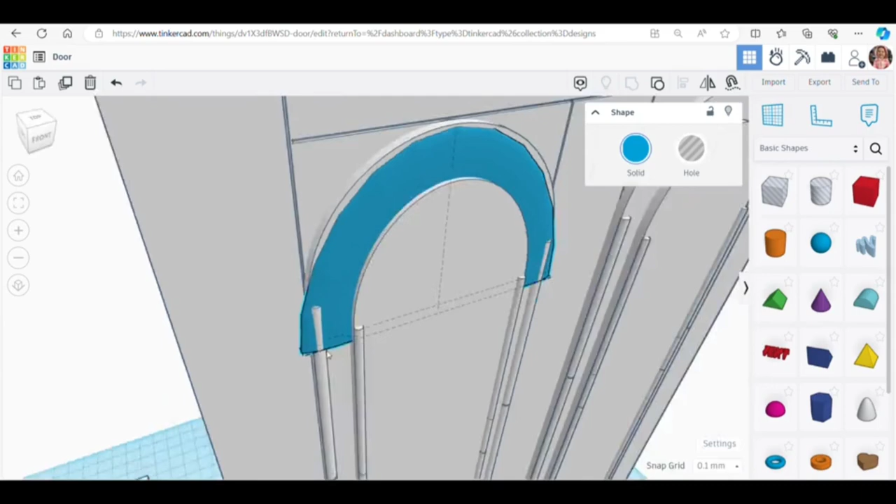Oh yeah, Troy's putting so much more time into it. I think he kicked our butts, guys. No, no, I'm happy for him.

Okay, doorknobage. I wonder if he had to print anything separate, because I sure did. Oh, he probably just... oh, he probably printed it with supports standing up already. Geez, I probably could have done that too.

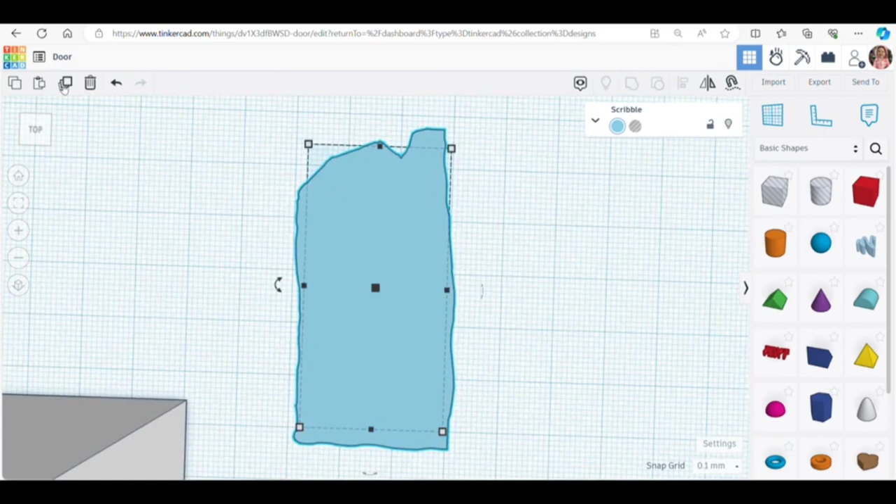Woo, oh my gosh, we forgot a keyhole. We did, not just me. You subscribers, I should have had a live chat. Ah, keyhole, guys. Oh no.

Oh yeah, okay, he's doing this outer border thing, door frame, which by the end you would recognize. Maybe. It's certainly, once he showed me the reference photo, I was like, oh my gosh, that's so cool.

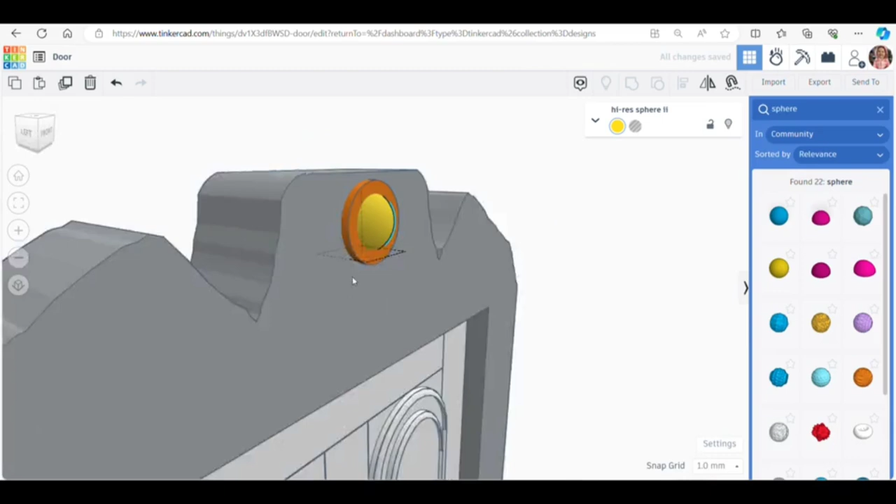Wow, yeah, I should have. Hey, I was like, hey, there's a doorknob. Oh, I should have chosen a cooler door. My door's only going to be cool to like a retired guy that worked at Menards for 30 years. He'll be like, that looks like the model JM 72 incher.

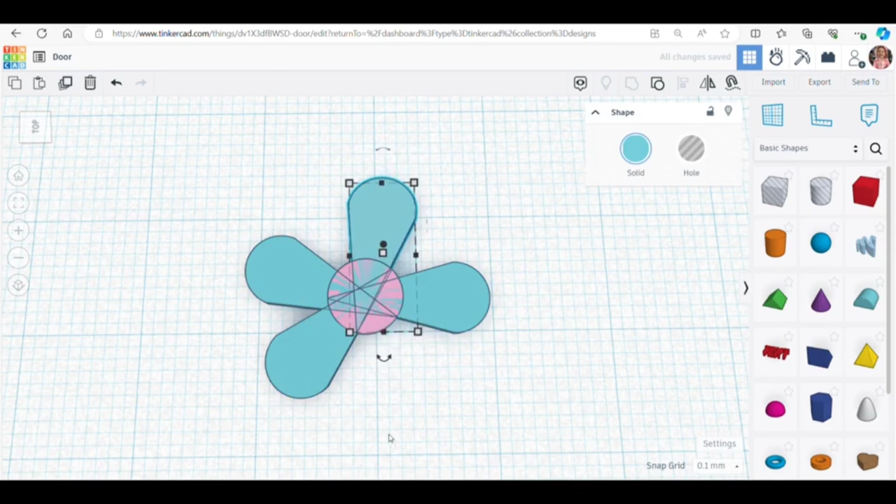Okay, what do we got? Oh yeah, he's doing some little inlays. See, he's got to do the inlays just like the real one. I don't want to give it away yet. Oh, we got a flower. SpongeBob flower, you know them flowers in the sky behind SpongeBob's house? Oh, here we go, I better let him talk.

After many, many hours of designing and printing, I'd say it was roughly about 8 hours in total, done over the course of a couple weeks because I was kind of busy with the holidays and work and whatnot. Then the printing time was even longer, but I finally got it done.

You ready to check it out? As you may have seen from the Tinkercad design footage I sent over, it is, drum roll please, boom, right there. I went for, I don't know if you recognize the theme here, but it's Boo's door from Monsters, Inc., that Disney Pixar movie. I tried to make it as accurate as I could, down to all the designs in the gray part here.

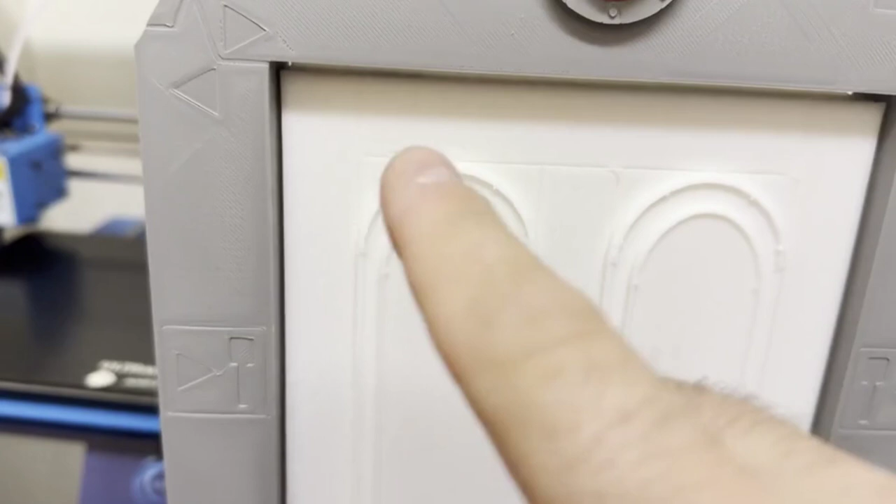Even the little nuts and bolts in there, and this little red light, this trim, the flowers. I don't know if I got the colors exactly right on the flowers, but they're awesome either way. This part was actually super tough, getting these curves in here, these little lip curves. That's why you can see a little bit of imperfections there, but I'm fine with it. It took forever.

I'm good. Now the real test, does it open and close? Let me just take my little doorknob here. It does. It's hard to do one-handed, but there you go. Ta-da! Just to give you an idea, I'll show you the hinge on the back side here. I even made my hinges gold as well, but there they are. I put 3 of them on to make it as realistic as possible. There it is, it opens and closes.

Man, that one was a doozy. I don't know why I came up with that idea, but it was a challenge, and I kind of dug it, especially as I was getting near the finish line. Thank God for that.

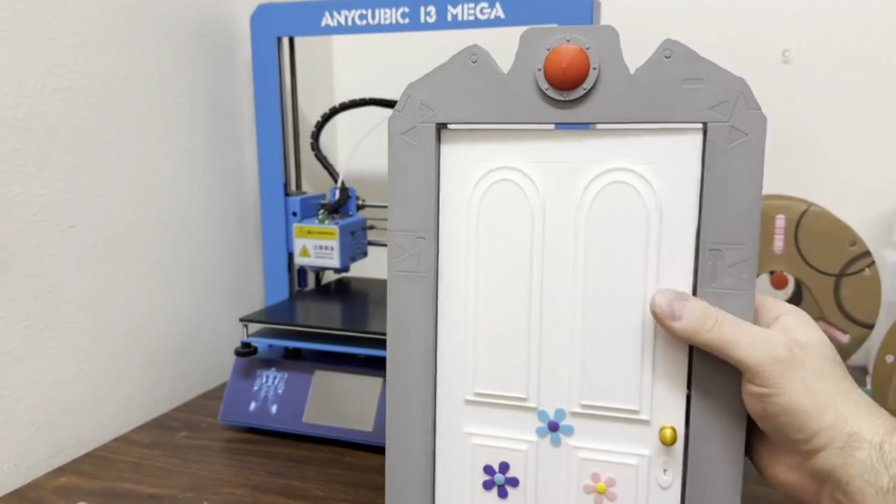And as you can see, I made it jumbo size too. I knew right off the bat, when I make a door, I want it to be kind of big, I want to really show the depth and detail of that door. So as you can see, this thing's probably a good, just guesstimating, a good foot tall for sure. This is my hand in front of it right here. Let me just lay it down quick, try not to break it. This is my hand on the door right here. It's a big one, Mr. Grinch. Alrighty, whew, another one down.

3rd challenge down. Alright, bring it on. What you got for a door? I'm sure yours is going to be pretty sweet and amazing as well, yours always is. But, Monsters, Inc., Boo's door, pretty sweet, right?

On to you, sir. Oh my goodness, after seeing Troy's door, there's only one thing to do. Just kidding, I love my door, it's just not as cool. I am going to have to concede. Troy, you won this one, buddy. You put the work in it, and you got the results. Was that a good presentation, PowerPoint, motivational speaker, Matt Foley speech?

I love my door still, but it's very simple and boring. We should have picked a themed door as well, like the Stargate. I learned my lesson, don't be boring. Awesome, hey good job Troy, you rocked it, I can't wait to see that door.